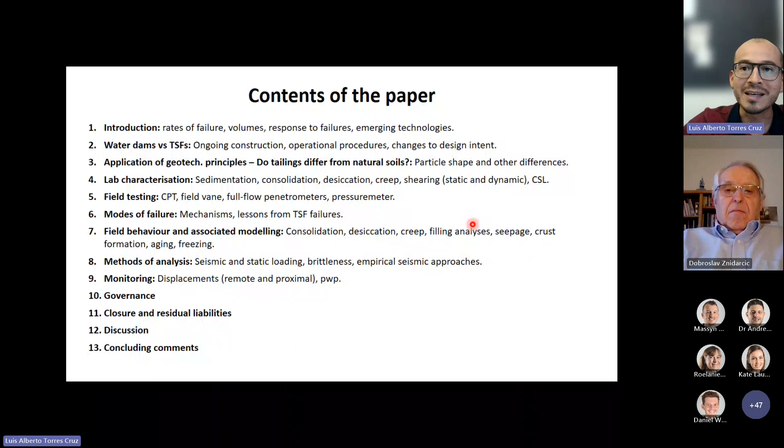Today's presentation, the time allocated to it, would not be nearly enough to go through all of these sections. So Dobroslav and I will be presenting mostly on the topics that we contributed to the paper. The presentation is divided into 2 parts. Firstly, I will present on CSL testing, difficulties with CPT interpretation, and lessons from failures. Then I will hand over to Dobroslav, and he will be presenting on sedimentation, consolidation, desiccation, creep, filling analysis and seepage. Okay, so let's get started with part 1.

I will begin by talking about the critical state line, or steady state line, as some of you might know it. Most of you will be aware that a critical state line is essentially defined in 3-dimensional space, and we typically use 2 projections to capture that 3-dimensional nature. One of the projections is void ratio versus mean effective stress, and the critical state line is defined by these points, where each point defines the critical state reached in a triaxial test. So it is quite an endeavor to get a critical state line, because for each point you want on your critical state line, you have to run 1 triaxial test.

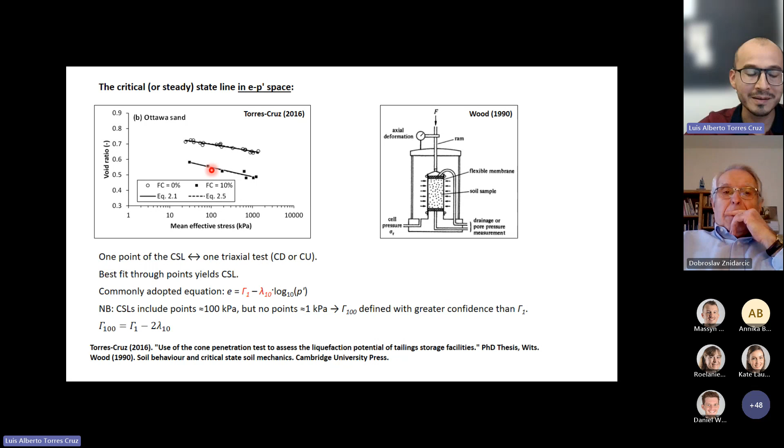And that gamma 100 would be the value of the critical state line when P prime is equal to 100 kilopascals. Can you still hear me? I think my pointer has frozen. Yes, we can still hear you. Okay, thank you, let me just plug in a cable here just to make sure. Just a minute. Okay, PowerPoint is not responding. Just 1 second, apologies for that.

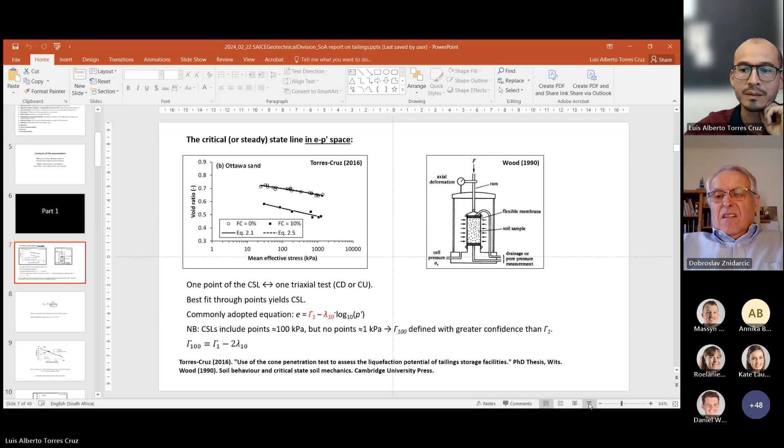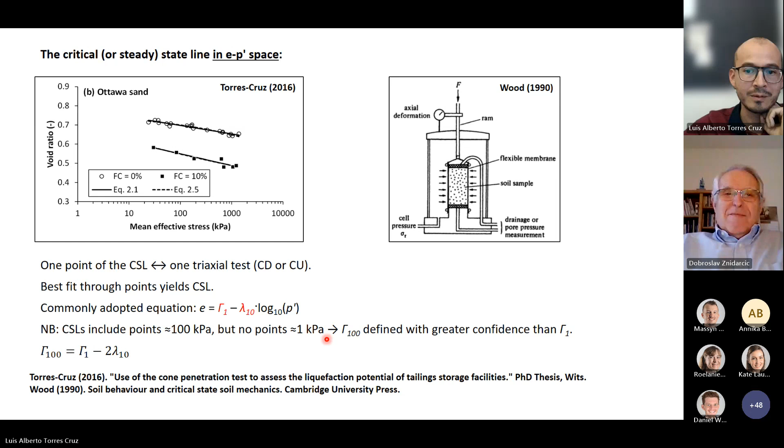Okay, you should be able to see my presentation again. All good. All right, thank you. There's the equation. If you ever have to deal with data, calculated lambda values using 2 different logarithmic bases, now you know how to switch from one to the other.

Let me touch now on the importance of this critical state line. Why is it that we pay attention to it when dealing with tailings? Essentially, your critical state line or steady state line divides this space of void ratio versus mean effective stress into a contractive area and a dilative area. Now, think about what happens if you have a point in the dilative area and you shear this specimen undrained. By definition, because of how we have defined this critical state line, we know that this specimen is going to want to move towards its critical state line.

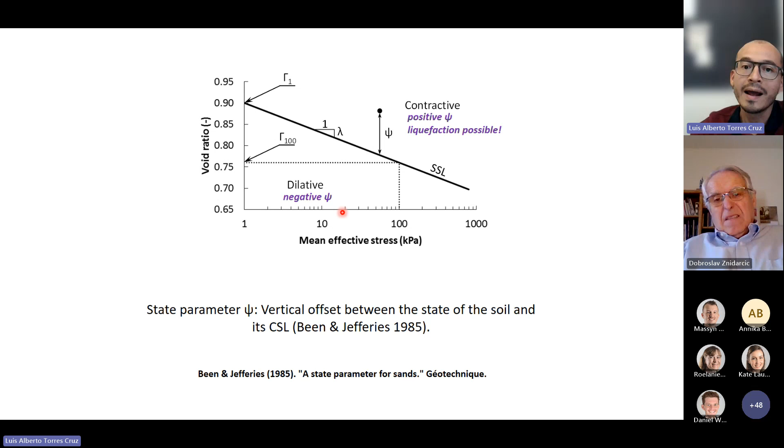In this case, when it's on the dilative side, it would move towards the right. It can only move towards the right, not up and down, because this is undrained shearing, so the void ratio cannot change. If it moves towards the right, it implies an increase in mean effective stress, which results in an increase in shear strength. So that's all good. The opposite happens if you're on the contractive side. If you have undrained shearing there, the only way the specimen can approach its critical state line is by moving to the left, which implies a reduction in mean effective stress and therefore a reduction in shear strength, which is not good.

I said that the critical state line exists in a 3-dimensional space. The void ratio versus P prime space that I was showing in the previous slide is one of the two projections that we can use to capture that 3-dimensional nature of the critical state line.

The other projection is this stress space right here, defined as Q versus P prime, essentially deviator stress versus P prime. In this space, the critical state line is always straight and always passes through the origin—the y-intercept is 0. If the y-intercept is 0, then you only need a slope to define this projection of the critical state line.

This slope, which in this case is 1.25, is what we call MTC, where TC indicates that it has been obtained from triaxial compression testing. This M is generally termed the critical friction ratio.

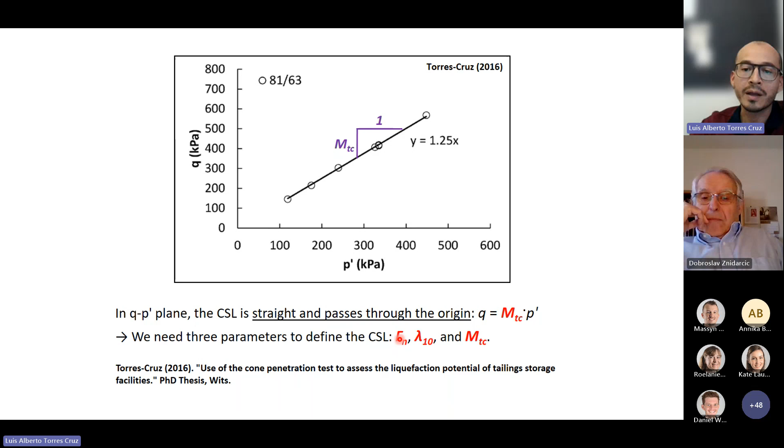So in summary, we need 3 parameters to define the critical state line: your gamma, your lambda, and this slope M.

Now let me say one more word about this Q-P prime projection. I really like this projection because it is independent of the particle size distribution of the soil that you are analyzing. At least this is the case for non-plastic tailings.

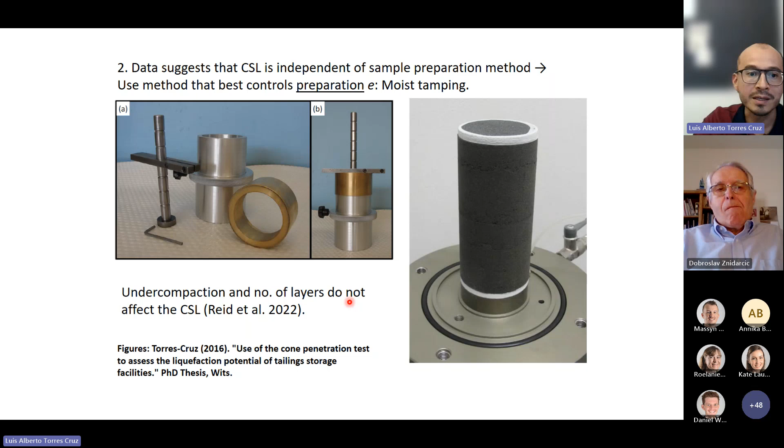I should also point out that the round robin paper I referenced earlier shows that under-compaction and the number of layers you use to build your triaxial testing specimens do not affect the resulting critical state line.

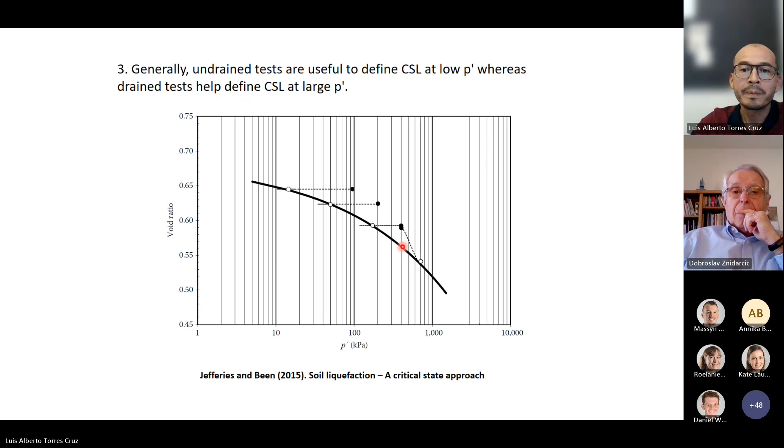Say I want a point between this one and this one. In other words, I want a point at a critical state P prime value of 200, 300, of 400, right? Then if I want the critical state to be at 400 kilopascals of P prime, I can plug those 400 kilopascals into this equation, and this is going to give me P prime I, which is the consolidation level at which I need to set that triaxial test.

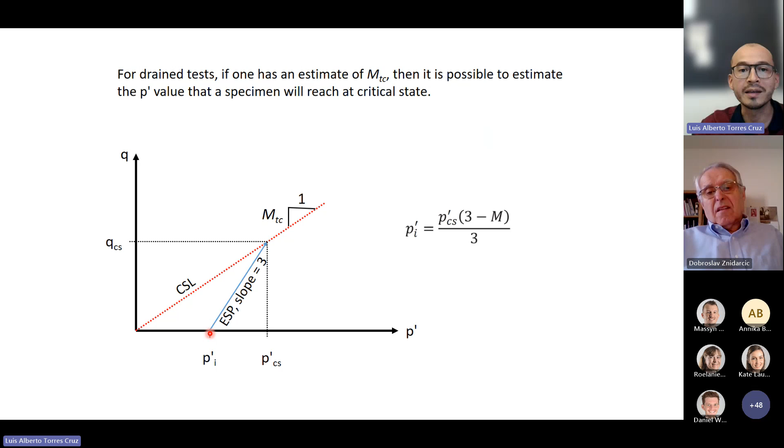And number 4 is that void ratio determinations require the measurement of the water content at the end of the test. There is no way you're going to get reliable void ratios if you are basing them on measuring the dimensions of the triaxial testing specimen. These reliable measurements of water content at the end of the test have to be done either by the freezing method or the squeezing method.

So for details of the freezing method, you can have a look at this reference right here. And for details of the squeezing method, you can have a look at these 2 references right here.

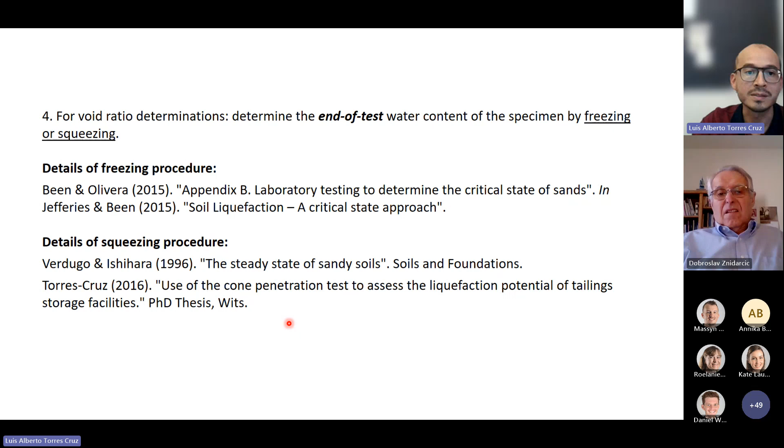In the 2022 CSL round robin paper, we find this statement that the laboratories that used the freezing method produced the most consistent CSL definitions. And there seems to be the idea that the freezing method leads to more reliable void ratio measurements.

And that's a bit problematic because not all soil laboratories are fine with the freezing method. Some of them don't like the idea of putting their triaxial cells, or at least the base of their triaxial cells, in the freezer, because it might damage some of the components of the base.

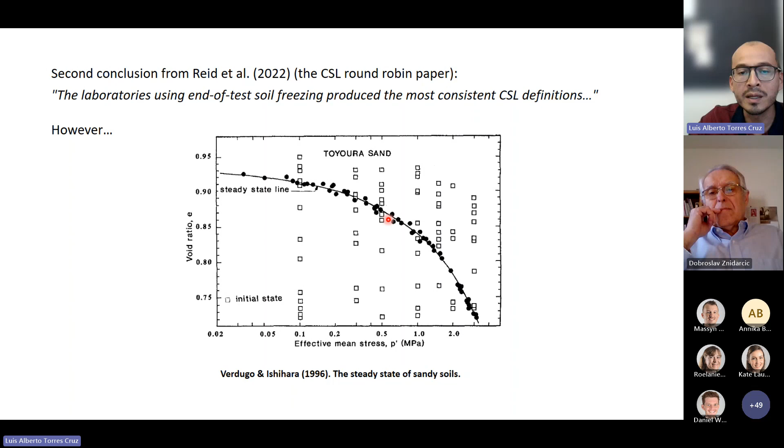And I would say there is no reason, or I know of no reason, to why one should not use the squeezing method. The first advantage is that the laboratories will not object to it, but perhaps more important than that, this critical state line comes from a paper from 1996, and it is one of the best defined critical state lines that I have seen in the literature. It is really well defined.

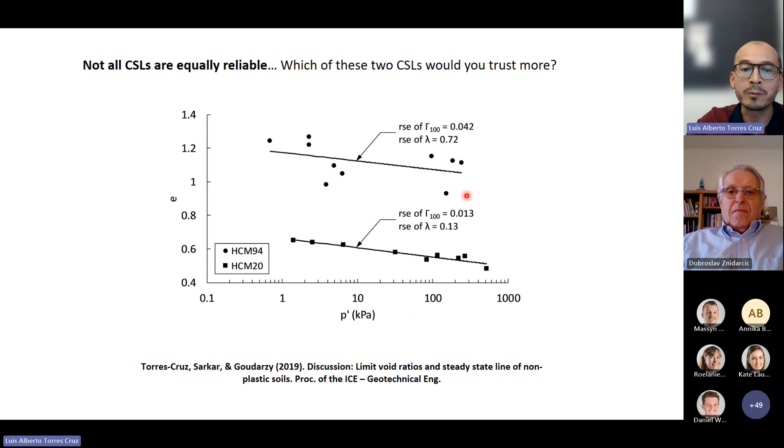The scatter is very low, and it was determined using the squeezing method. And the last thing I would encourage you to keep in mind is that not all critical state lines are equally reliable. So whenever you get a critical state line, make sure you're not getting only the line itself, not just the gamma and the lambda, but that you also look at the amount of scatter in the underlying points defining that critical state line. This is quite intuitive: if you have a great degree of scatter, you're going to have less trust in that result than if you have a lower degree of scatter.

Now I want to move on to CPT interpretation, and in particular to difficulties regarding CPT interpretation. I focus here on the CPT because it seems that in today's geotechnical practice in tailings, CPT is the preferred tool to assess the mechanical competence of tailings.

This is reflected to some extent in the reports that have investigated the failures of several high-profile dams over the last decade or so. Here I have the report for the Fundão tailings dam failure, here the one for Cadia, and here the two for Brumadinho, one led by Robertson and the other by colleagues at the University of Catalunya. I am highlighting the methods that focus on the estimation of the state parameter.

I suspect most of you will be familiar with the concept of the state parameter. I showed it a few slides ago. It's that vertical offset, that void ratio offset between a specimen and its critical state line.

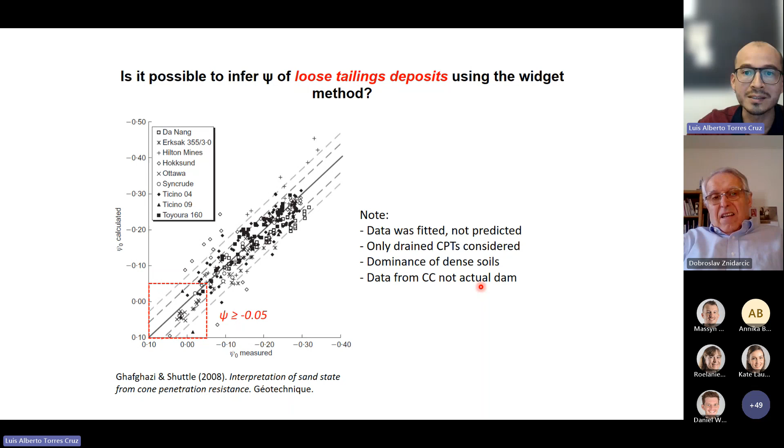So let's have a closer look at some of these. Here we can see CPT data from Merriespruit, which you probably know failed back in 1994 right here in South Africa. You can see that very often in tailings dams, you will have some CPT data that is drained, but you can also have data that is partially drained or even undrained, at least according to this chart.

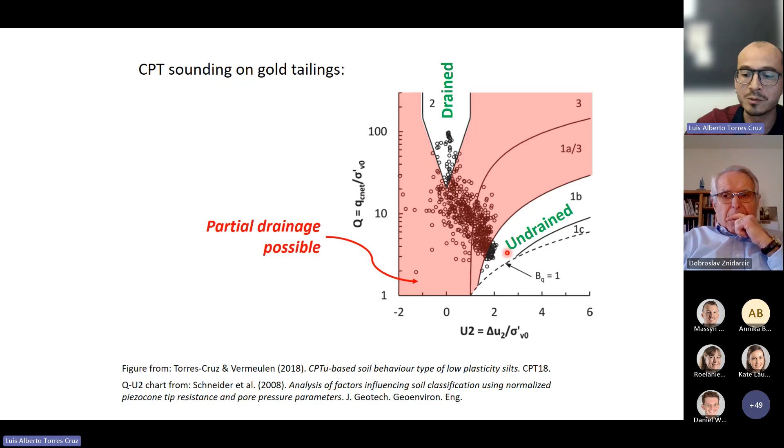Surely things have changed now. But if you look at the post-failure reports for Fundão, Cadia, and Brumadinho, you will see that the horizontal stress ratio has been assumed in all of them rather than measured. So it seems that not much has changed in terms of measuring the horizontal stress ratio.

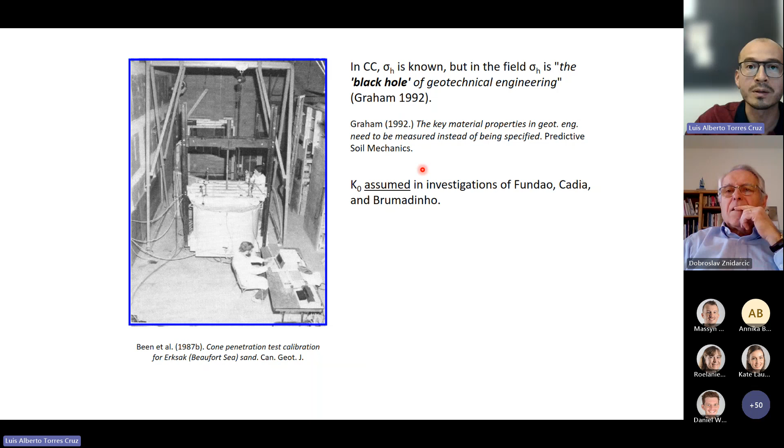Another important difference between a calibration chamber and an actual tailings deposit is that in a tailings deposit you can encounter very fine layering. And when I say very fine, we're talking about centimeters and sometimes even millimeters. You can encounter this in gold tailings, iron tailings, all sorts of tailings. This means the particle size distribution is changing from one layer to the next.

That leaves us wondering, if there's a change in particle size distribution, then there will be a change in the critical state line. So which is the critical state line of this? I have not seen investigations into it. I believe at this point, the short answer is we don't know.

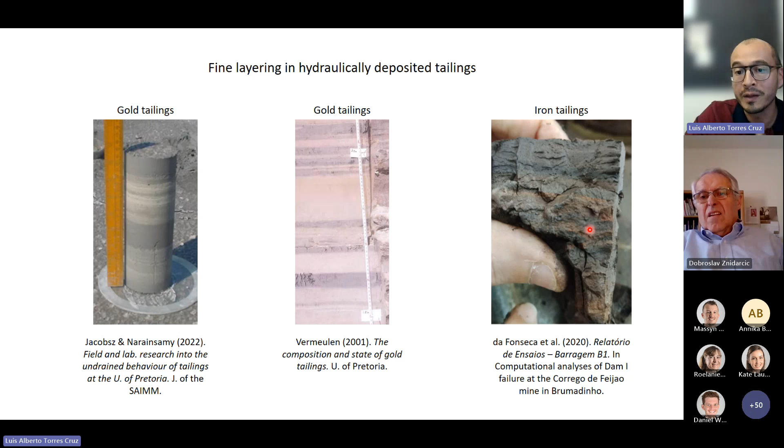Perhaps the most important thing is that whenever we are assessing the validity of an engineering methodology, the ultimate test is not the assumptions, where it was published, who published it, or how fancy the mathematics is. It doesn't matter. Only one thing matters: whether your predictions match the measurements. That's it. Of course, I'm talking from a practical point of view. From a research point of view, we can argue about that, but practically, the question is do your predictions match your measurements?

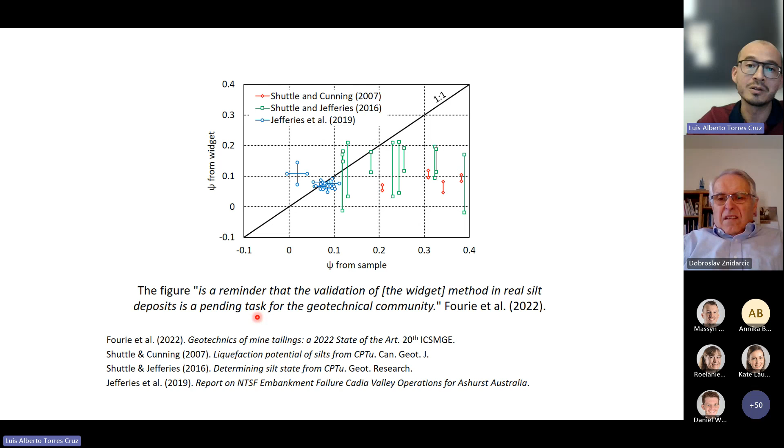Coming to my last slide, it's just a quick excerpt from our paper, included in the section called Reconciling the Results of the Expert Panel Report and the CIMNE Report on the Causes for the Brumadinho Failure. These were two independent reports that looked into the Brumadinho failure, and they arrived at different conclusions about what had caused it.

We comment that a rational approach to the dilemma resulting from the different conclusions these two reports arrived at is perhaps to adopt the approach suggested some time ago in previous works: if there are tailings that are liquefiable, assume they will liquefy, rather than trying to predict plausible trigger mechanisms. Simply assume liquefaction will be triggered. Although this is certainly a seemingly logical suggestion, we acknowledge it comes at a sometimes substantial financial cost—it's expensive to be building all those buttresses. I suspect this is a position that maybe not everyone will agree with, but I'm sharing it here just to share what our position was in the paper.

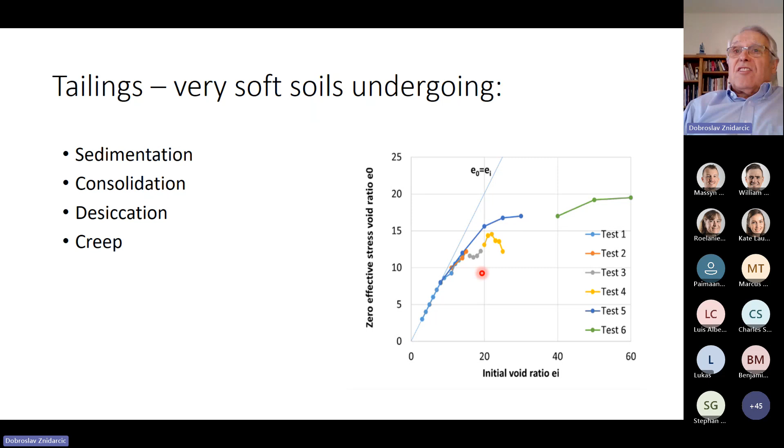So if we deposit the material at the lower initial void ratio, it may not undergo sedimentation, but if it is deposited at the higher void ratio, it will first undergo sedimentation until it reaches the consistency that corresponds to the soil. So that is this part on this.

Because these materials are so soft, they require some special testing. Our conventional consolidation tests will not work necessarily well for these materials. So we have developed laboratory procedures that allow us to determine consolidation properties and use them in predicting the consolidation behavior in the field, as well as desiccation.

The testing procedure is based on a seepage-induced consolidation test that was originally developed or proposed by Imai, but this test was somewhat modified in the analysis part of it, where we solved the inverse problem solution to obtain the parameters.

We characterized the void ratio effective stress relationship in the form of a power function that was originally proposed by Somogyi, but we added another parameter, Z, to identify the initial void ratio for that material, and that void ratio for sigma dash equals 0 would correspond to our zero effective stress void ratio.

We can obtain, therefore, in a single test, the relationship between the void ratio and the logarithm of effective stress. And we will find that many tailings will be either coarse grain materials with relatively low void ratios, or fine grain materials which will have high void ratios.

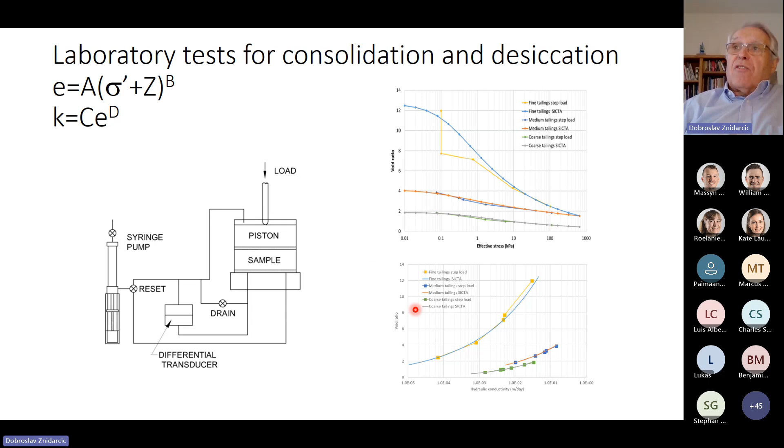In order to do so, we have also found out that many of these tailings will undergo consolidation and desiccation following the assumptions and procedures that were originally proposed in 1967 by Gibson and his coworkers.

However, if we treat these tailings with some chemicals, some flocculants, we create flocculated structures in which you have material full of flocks, various size flocks, but the flocks are not rigid. They are deformable, and therefore as the stress is applied to them, they will slowly deform not only in volume, but in shape as well.

And that will lead to a non-unique relationship between the void ratio and the effective stress. We started developing this technique for oil sands tailings in Canada, and we found out that for these materials...

Compressibility, or the volume change, occurs not only as a consequence of expulsion of water under the effective stresses, but also as a consequence of elapsed time. And so in that case, we will have different compressibility curves for different durations of tests or different durations of loading.

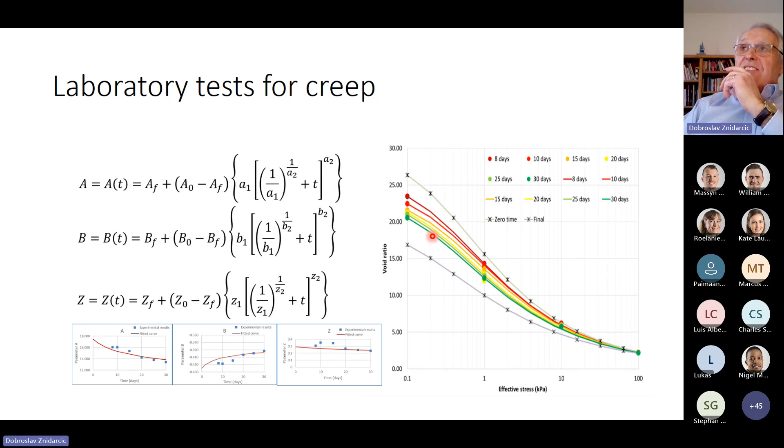You can see here from some experimental data that we can measure these curves at different times, typically up to a month. Running any test longer than a month is pretty tricky. But after measuring these changes in the compressibility curve for a period of a month, we can find the values of different A, B, and Z values, and then interpolate the function that looks like this.

So now, when we have the material characteristic that we can use, we will demonstrate the process of consolidation, desiccation, and creep on a very simple example where we have a column of these tailings that is 5 meters high, and we will predict how this material will behave with time.

Here you have the settlement curve for this material, and you will see we represent both the coarse and fine tailings. In principle, they are exactly or very similar curves, except that the rate of change is different. Of course, for fine tailings it can take a very long time.

Here you can see the problem: very often, even for such a simple column, fine tailings typically require several years to consolidate completely. For coarse tailings, that may be a matter of weeks or months, but for fine tailings, it's a very long time. Here we are predicting the change in void ratio versus time during the consolidation process.

On the left-hand side is basically for coarse grain material. On the right side is for fine grain material, and they are in principle very similar, except the magnitudes of the void ratio change are different.

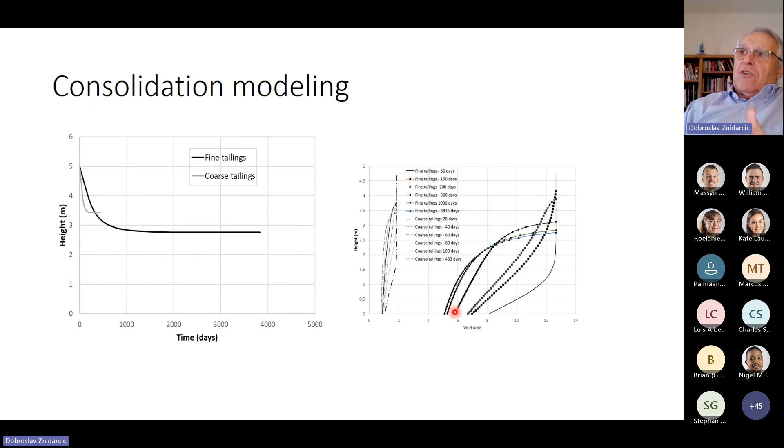In other words, the critical gradient is keeping it buoyant until the consolidation front reaches the top, when you start getting the concave form of the curve toward the final value. So this is just for consolidation modeling.

After the consolidation is completed, or during the consolidation, we can also have desiccation or shrinking of that material, because we have evaporation or drainage to the bottom and so on, and we wanted to model this desiccation as well.

You will see that in shrinking material, you will have a saturated condition all the way until you exceed the air entry value, which in many cases, especially for fine grain material, will be very close to the shrinkage limit. So this would be the shrinkage limit. The material is not going to reduce in void ratio below this value in the drying process.

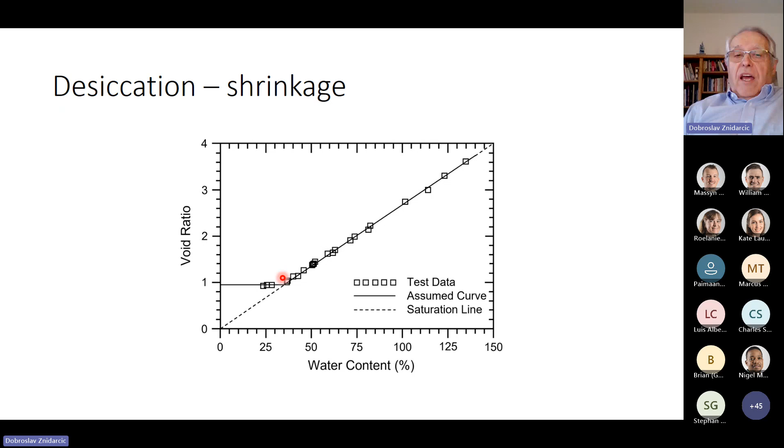Then if you have an air entry value that is reached before the shrinkage limit, then this curve will start deviating from here and may go like this to the end. So just to understand what the shrinkage process looks like.

Here is an example of desiccation modeling for the same materials we did for the consolidation modeling, for the same column of 5 meters with an effective evaporation rate of 3 millimeters per day. Initially the consolidation will produce settlement rates higher than 3 millimeters per day, and therefore there will be no evaporation. But once the settlement rate drops below that value, desiccation takes over, producing 3 meters of settlement due to desiccation in 1,000 days for the fine materials.

You will see the desiccation here will also start creating a crust on top of this material, where we will have crusting while the consolidation is still undergoing underneath. We will develop a crust.

Depending on the ratio of the void ratio versus the hydraulic conductivity of the material versus the evaporation rate, this crust may be very deep and slowly developing, or it can be very shallow, very thin and developing very fast. If we had, say, 5 times higher evaporation rate, this crust would start developing much earlier and go much faster, creating a very dry topsoil.

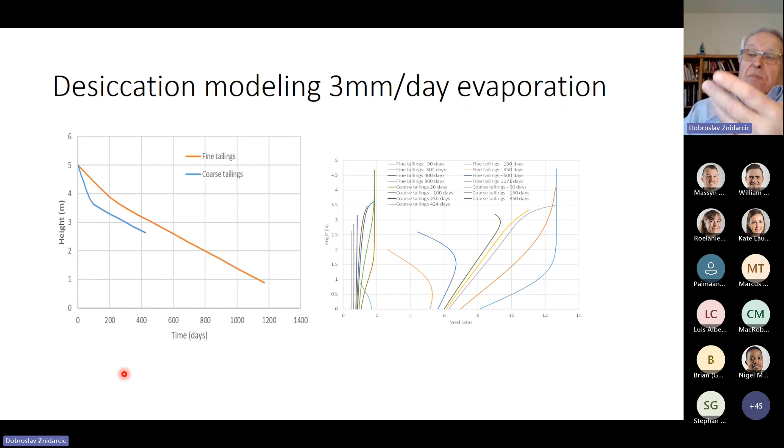The desiccation will progress until you reach the shrinkage limit of this material, either in the whole layer or at the very surface. Once you reach the shrinkage limit, the material will start desaturating, reducing hydraulic conductivity further, and therefore preventing effective evaporation. That's why the desiccation practically stops at the moment when you reach the shrinkage limit.

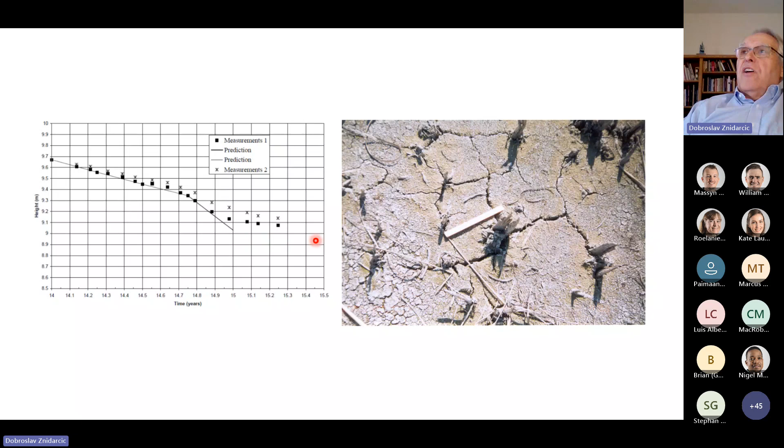We have done some work in Florida and monitored phosphatic clay that was settling for about 1.5 years, and we were able to predict the development of the cracks with this model. We predicted that the crack would start developing after almost 1 year of observation, and then we measured these cracks developing. You can see here that the cracks stopped growing because the desiccation process was terminated.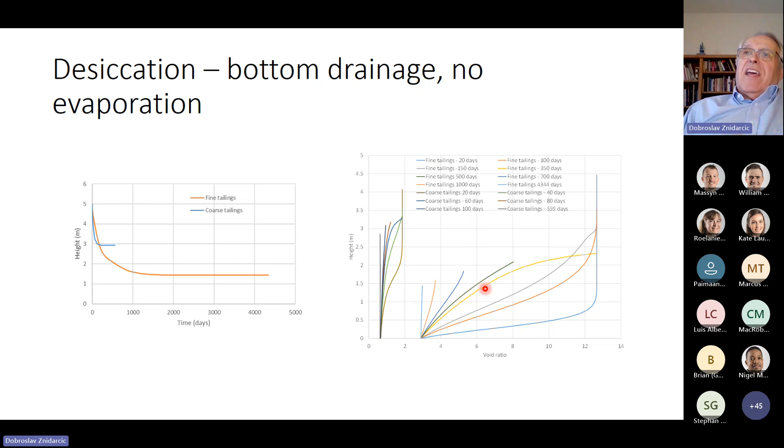We can get desiccation not only due to evaporation, but also due to drainage to the bottom. In that case, we don't even need any evaporation - if water is coming down after consolidation, you will start getting lowering of the groundwater table, until the water table reaches the bottom of the under drain, assuming it drains into atmospheric pressure. You may end up with material that has a uniform void ratio, or even going further due to hydrostatic capillary force above the water table. So we can model this part as well very efficiently with this approach.

We will now show the same column of 5 meters high, but with the creep characteristic that we obtained for a bentonite slurry.

In this case, you will see that consolidation only would produce a final settlement of about 3 meters. But please note the time scale for this material - we are talking about hundreds of years of consolidation in such an active and low pervious material. If we add creep, it will produce an additional settlement of 1 meter, but note that up to about 60 years or so, we will have no difference in the behavior between these two examples.

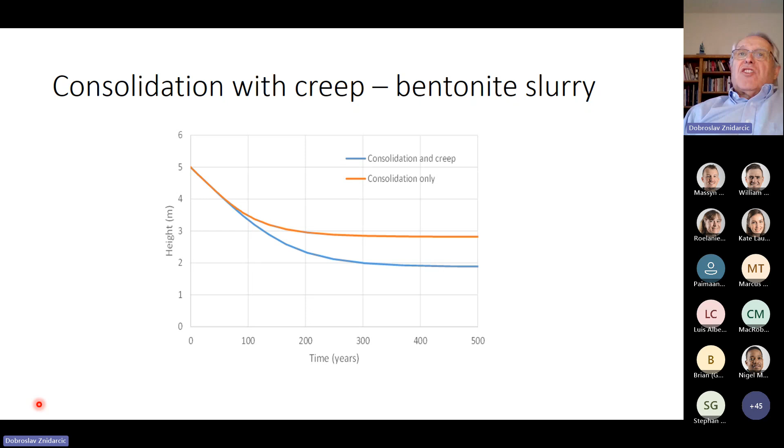Here is the void ratio profile with height for consolidation only, as you can see for these years. But if you include creep, you will notice that even during the consolidation portion, for example after 303 years, you will have practically finished consolidation, and your bottom void ratio is about 12. At the same time, if you have creep, that bottom void ratio will be below 10, somewhere around 8 or so. So indeed, creep is taking place during consolidation.

And we can predict what this effect is going to be. Of course, when we are talking about flocculated structure, that usually increases the hydraulic conductivity of the material, and as such the consolidation process is very fast, and therefore creep is the dominant process in that analysis.

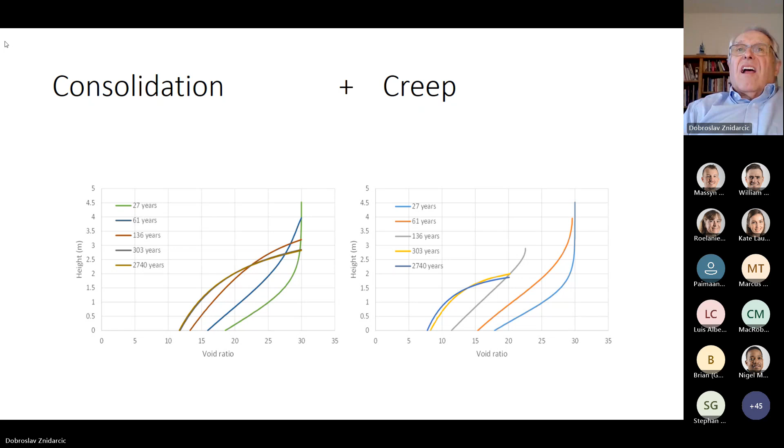Now, these models that we have developed and use in consolidation analysis are basically one-dimensional models - just a column, which obviously is correct. For tailings facilities, we obviously have a three-dimensional problem. However, we should recognize that in these cases, the heights we are talking about may be a couple hundred meters, but the extent is several kilometers, or at least a kilometer or so. So even in that three-dimensional case, the dominant consolidation will be dominated by the behavior of the material in the vertical direction.

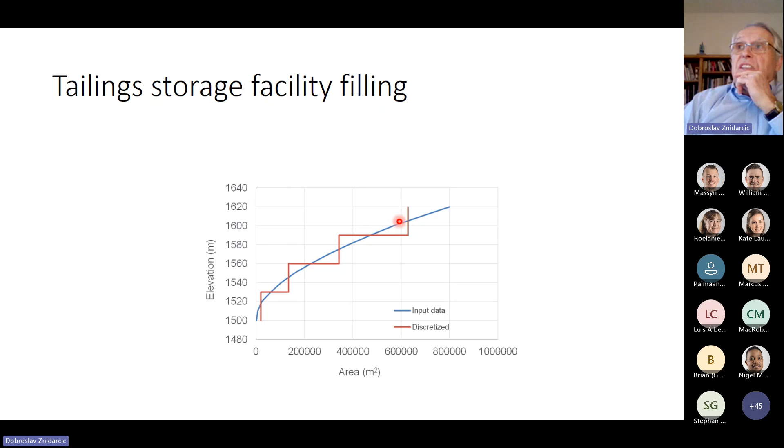The horizontal seepage, the radial seepage, will not have a significant effect on the rate of consolidation. However, because the facilities are three-dimensional, we do need to address this three-dimensionality, and we have developed a procedure where we take an elevation-area curve for the storage facility and discretize it into several layers. If we do that, we have two choices: either analyze this storage capacity as horizontal layers and see how it will be filled by changing the filling rate for each layer, or divide it into columns, as I will show next.

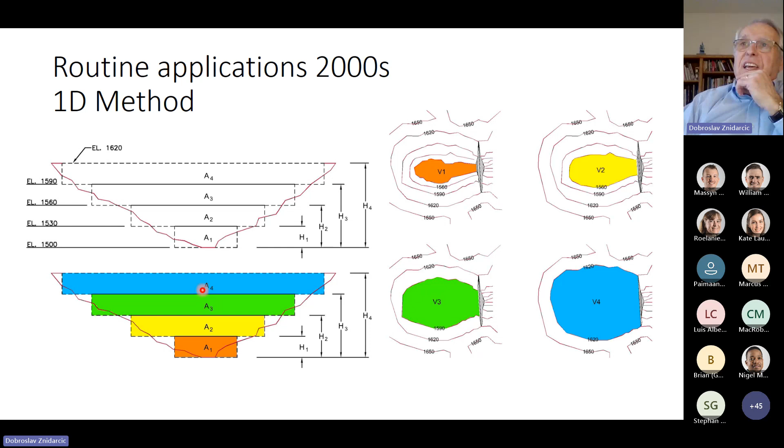Let me mention that this horizontal discretization will produce different filling rates for each height, but in reality we are analyzing only the central column. We are not accounting for the fact that the other columns, the other parts of the impoundment, are shallower. We are basically assuming that the material on the sides of the impoundment is compressing at the same rate as the tailings itself, which is obviously an unrealistic assumption.

Otherwise, we can discretize this into columns and start filling each column. This requires multiple analyses, where we fill the first column to the bottom of the first adjacent column. Then we start filling this column here to the next one, and while filling this part, we allow it to settle, so we have to come back and refill this one column to get to the same level.

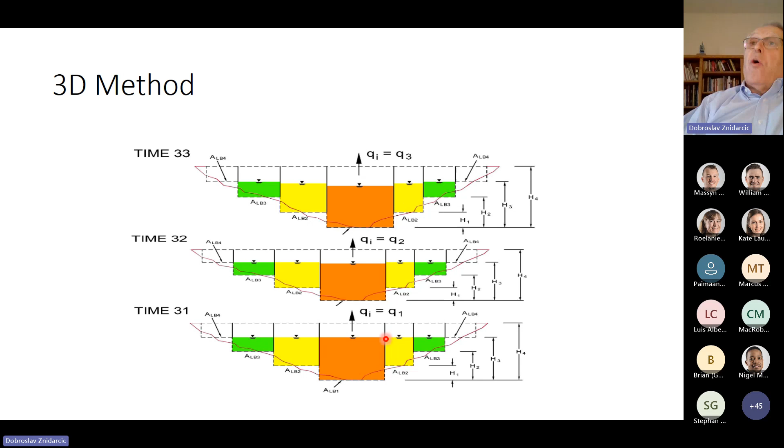By doing this repeated analysis, we maintain a constant level of tailings in all the columns, but recognize the different heights of different columns. If we do that analysis, we call this the 3D method, while the previous one was the 1D method. The filling may look something like this.

You'll see that the 1D method produces much larger prediction capacity for the tailings, or much longer life of the column, because we overestimate the volume available. In this situation, we actually slightly underestimate this volume. So we call this the lower bound, and this is the upper bound.

Both of these curves show a dramatic change in slope here. Why? Because for that particular example, the top layer was so wide that the filling rate became so slow that the consolidation process caught up with the filling process, so to speak.

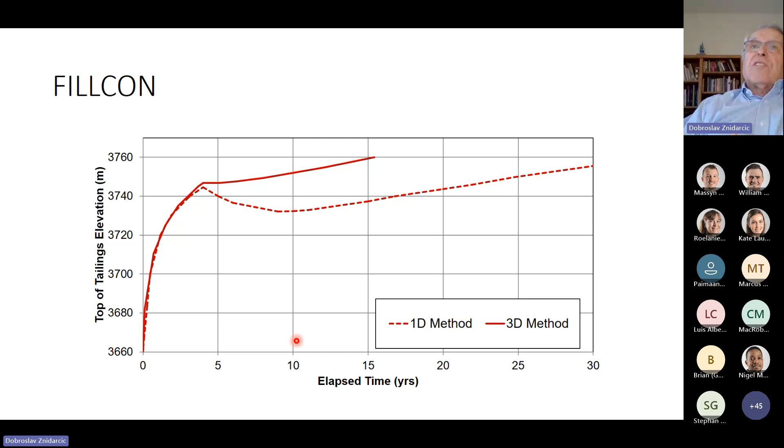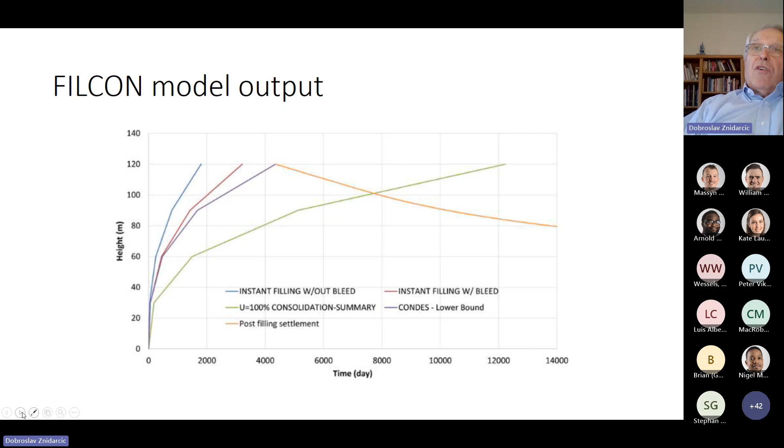So these are the tools we've developed to predict the behavior of tailings upon deposition. I want to emphasize the importance of seepage modeling. We've realized that seepage modeling is unfortunately not always done in light of the stability of the structure; it's mostly performed to calculate water balance for these structures. But here we are focusing on the stability of the structures.

As I mentioned earlier, the hydraulic conductivity of these tailings reduces dramatically with increasing effective stress and decreasing void ratio. Therefore, in any facility, you will have lower hydraulic conductivity at the bottom, which will prevent the seepage or water from draining to the bottom. Maybe it will drain somewhat, but it will definitely be impeded.

On top of that, we may end up having anisotropic materials, as Luis showed that they are indeed layered, which creates higher hydraulic conductivity in the horizontal direction. So we can expect that the only place this water could seep is towards the downstream slope. On top of that, this portion of the material is initially unsaturated or has lower saturation than the rest, so it will also have lower hydraulic conductivity, forcing higher pore pressures to develop here.

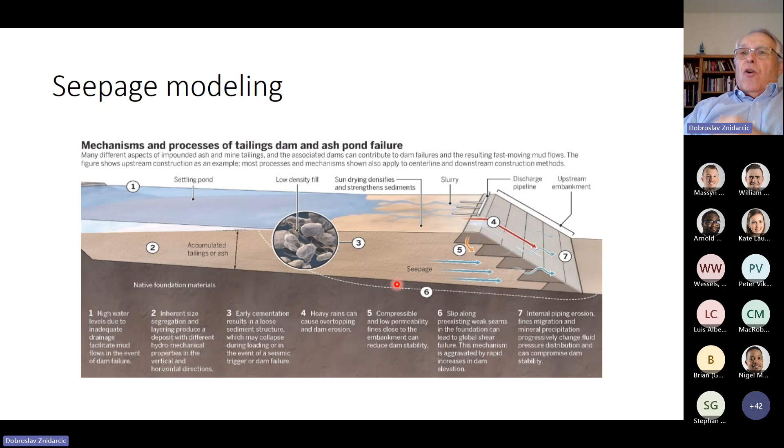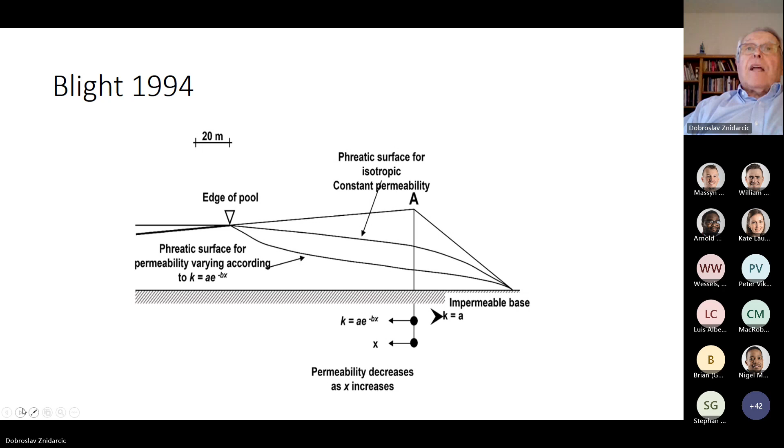We have done some analysis to address this unfavorable seepage condition: reduced hydraulic conductivity with depth, anisotropy with higher hydraulic conductivity in the horizontal direction, and unsaturated tailings with lower hydraulic conductivity near the downstream slope. All of these conditions create seepage conditions with higher phreatic line and higher pore water pressure near the downstream slope, eventually leading to slope failure.

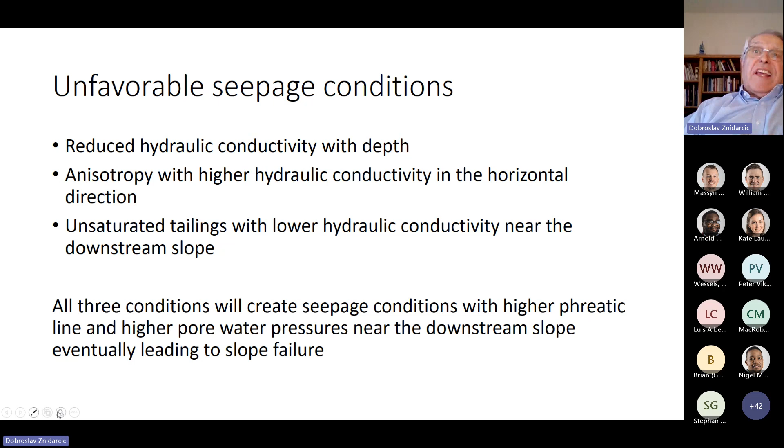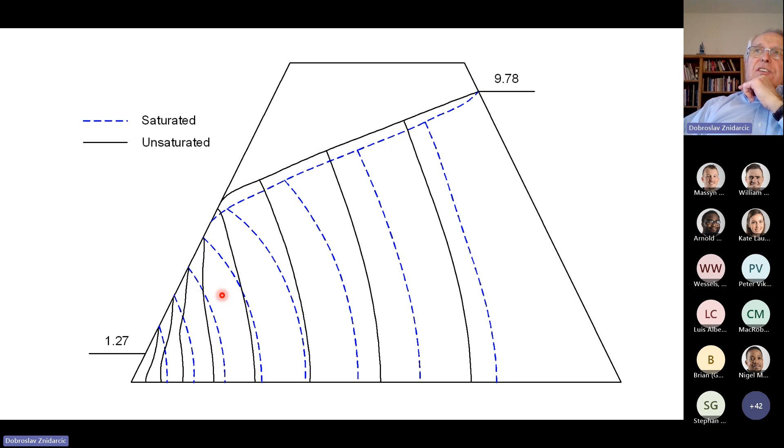As you know, any seepage that reaches the downstream slope of any sloping structure will definitely cause piping, and ultimately slope failure. So this summarizes what we have presented in this paper. Thank you.